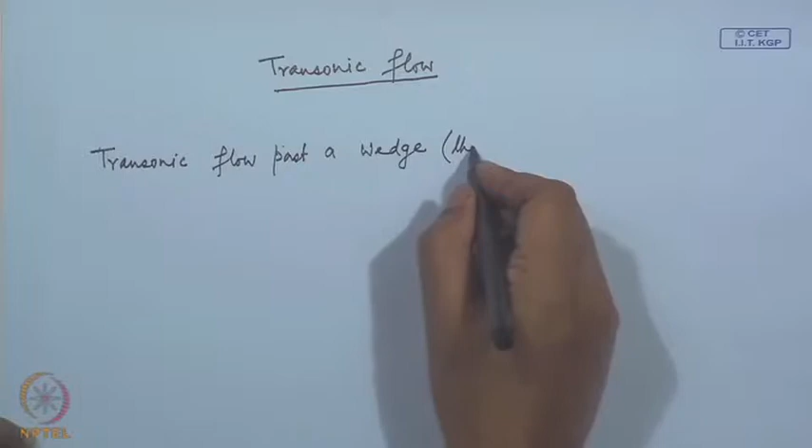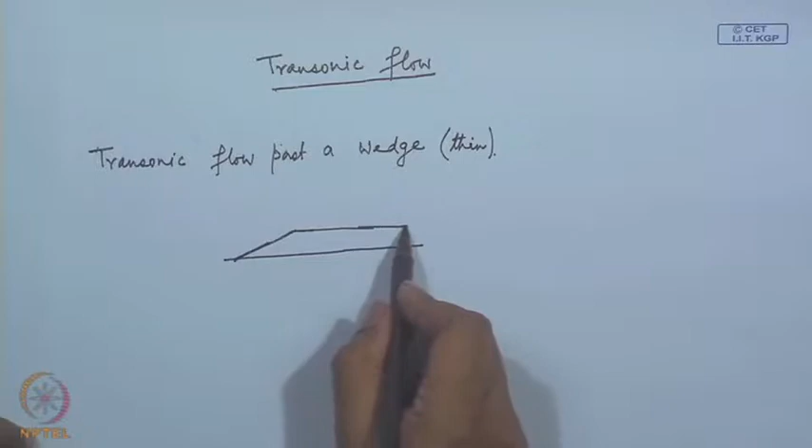Now let us first of all consider transonic flow past a wedge. Of course, we will consider a very thin wedge, and let us say that this is followed by a straight section. We will just consider half of the wedge. So thin wedge means theta is small.

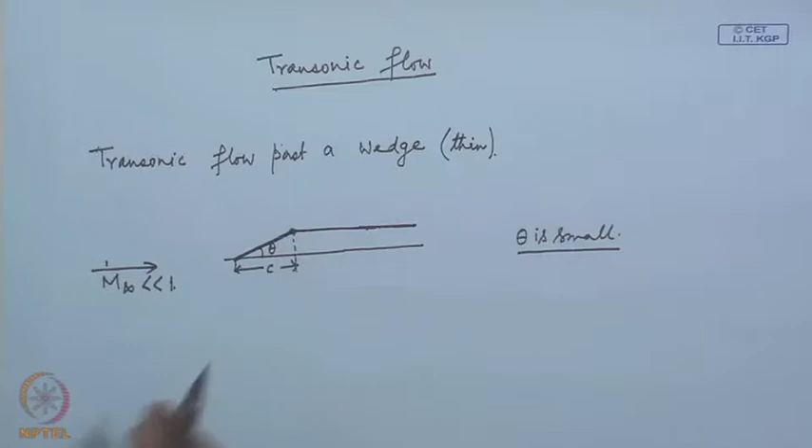Now what happens? Let us consider first a flow which is much smaller than 1. Consider a free stream m infinity which is much smaller than 1. We know the flow will accelerate over this wedge, will reach the highest velocity here. Let us see. Flow accelerates over this part.

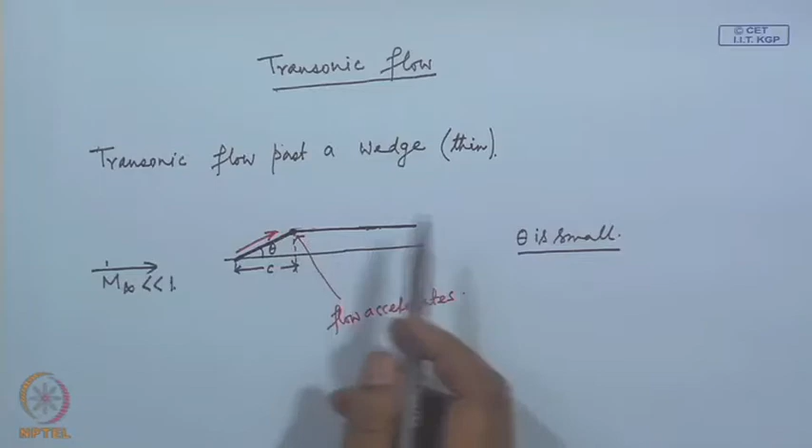Now, consequently, as we go on increasing the Mach number, a situation arises when the Mach number reaches unity here, and then there will be a supersonic region behind this shoulder, which will be terminated by a normal shock. So let us say at...

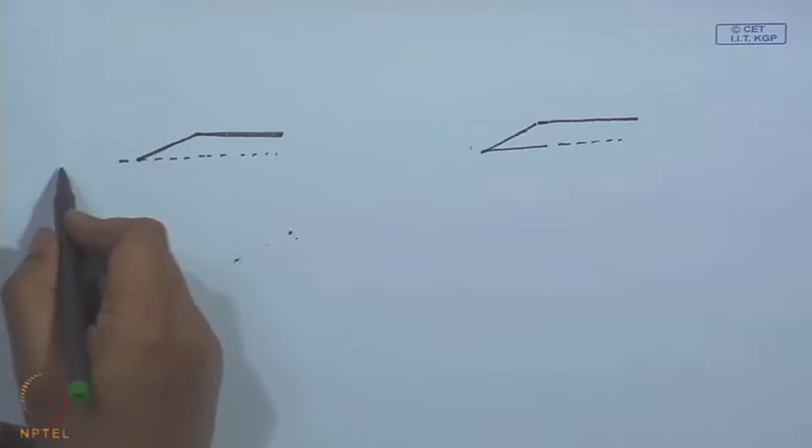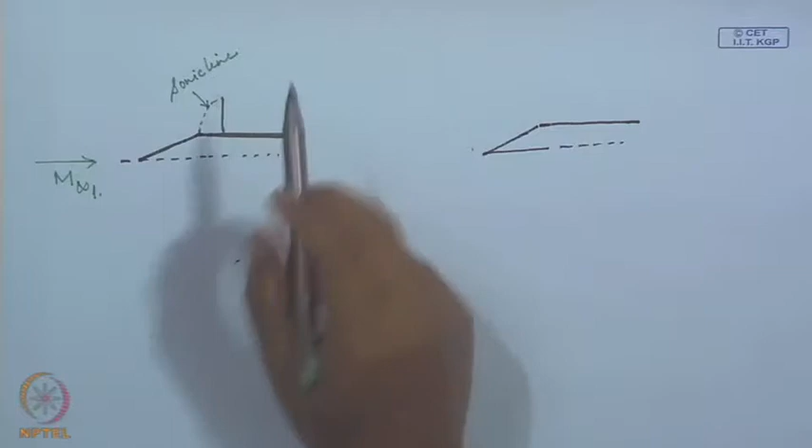Now consider these cases where here let us say we have a free stream Mach number m infinity 1, and this is the sonic line. That is, at all the points which lie on this line, the flow velocity is sonic. This is a supersonic region.

This is a supersonic region, and again here it is subsonic. This supersonic pocket is terminated by a shock, which is almost a normal shock.

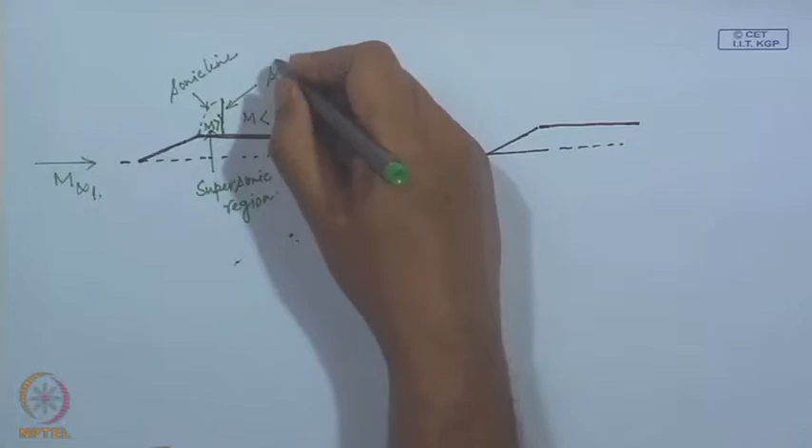Now let us consider another free stream Mach number, which is higher than this first free stream Mach number. Let us again call it m infinity 2. Again in this region the flow will become...

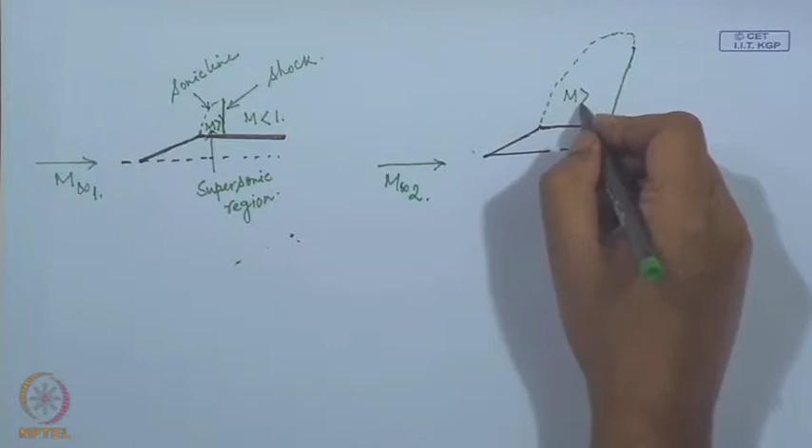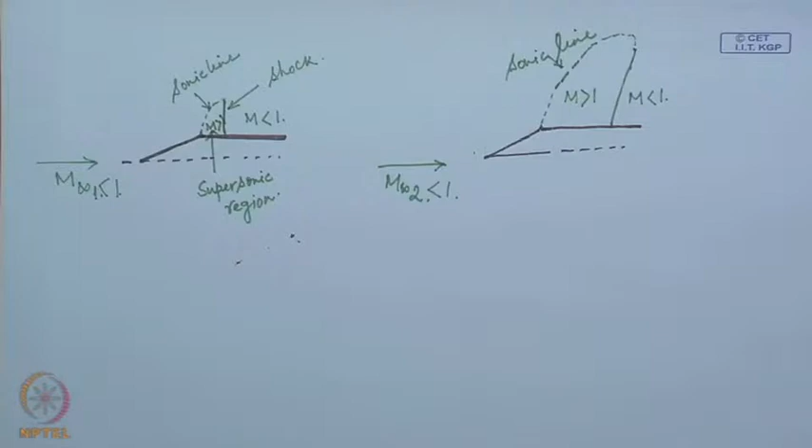In other words, as the free stream Mach number now goes on increasing, but they are still less than 1, subsonic, the free stream Mach number is still subsonic, however they are increasing, and we are seeing that as the free stream Mach number increases, the size of this supersonic region increases. Similarly, as we go on increasing this Mach number, the free stream Mach number, this shock goes downstream, the shock moves downstream, and the supersonic region increases.

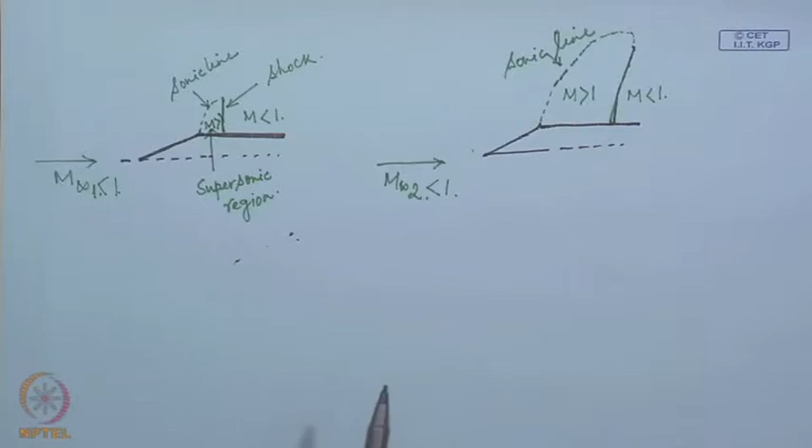So as the Mach number increases towards unity, the shock moves downstream, and the supersonic region will become larger and larger.

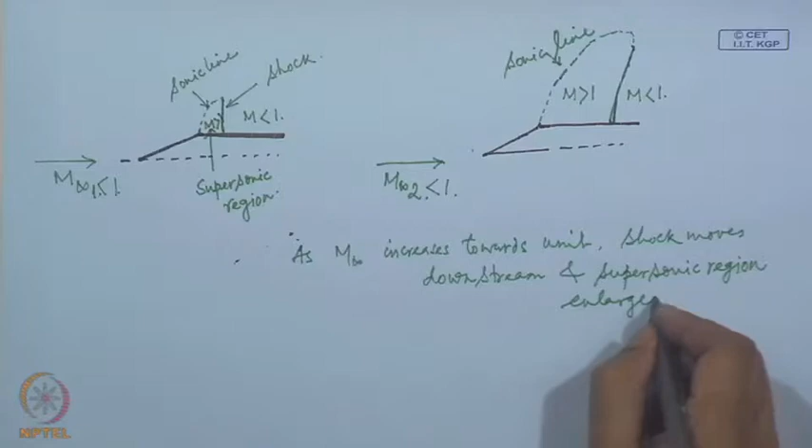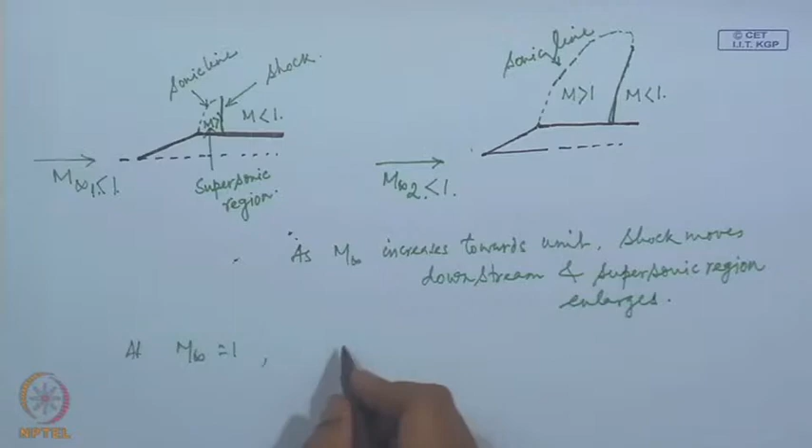Now when the free stream Mach number reaches unity, this shock moves to downstream infinity. However, simultaneously another shock appears at minus infinity. So at this point, the shock moves to downstream infinity, and another appears at minus infinity.

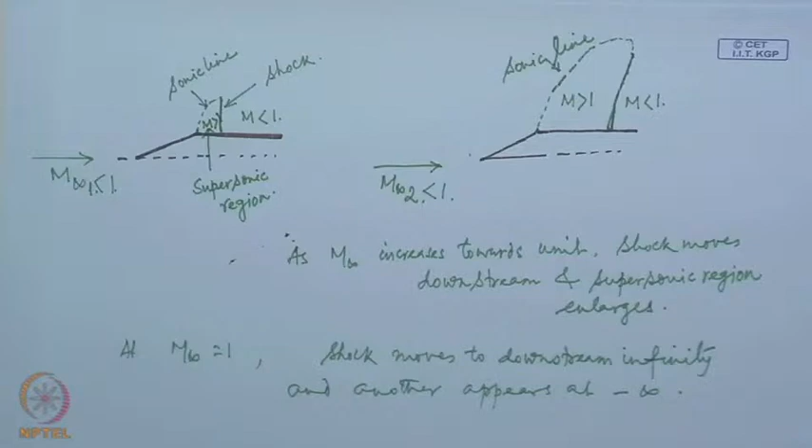Now let us say further increase of m infinity, that is the free stream is now supersonic and is going away from 1. This bow shock that first appeared at minus infinity will now move towards the body.

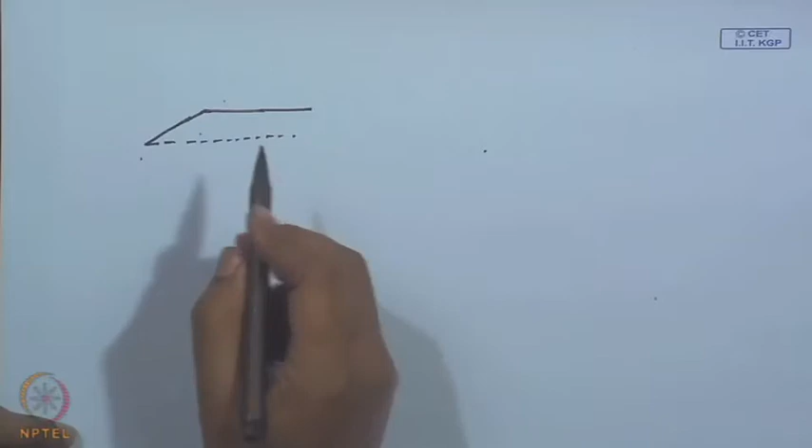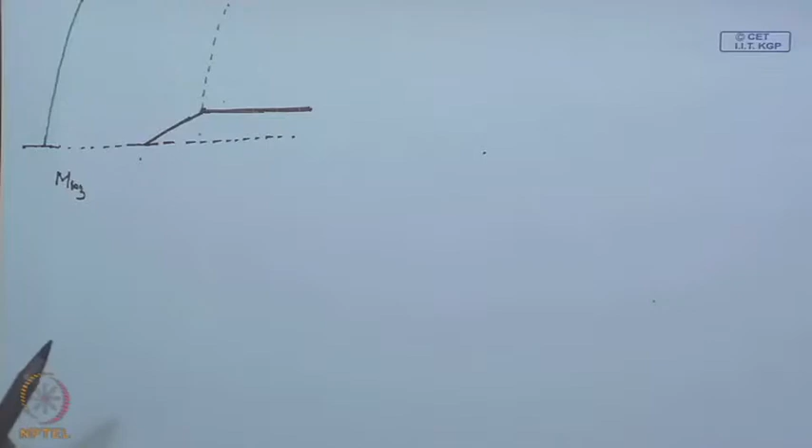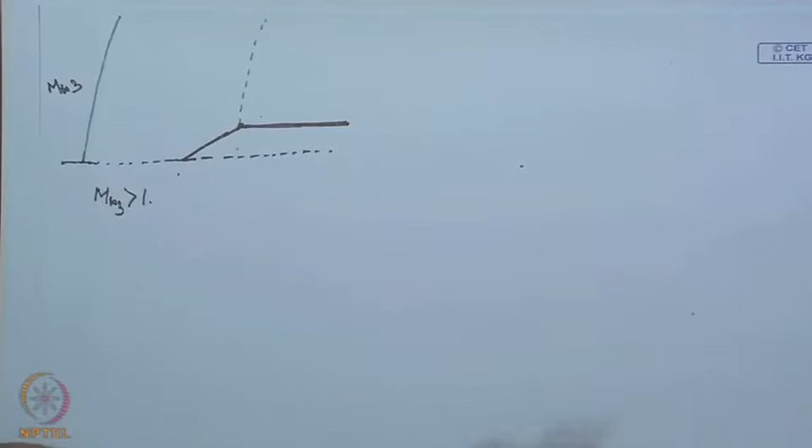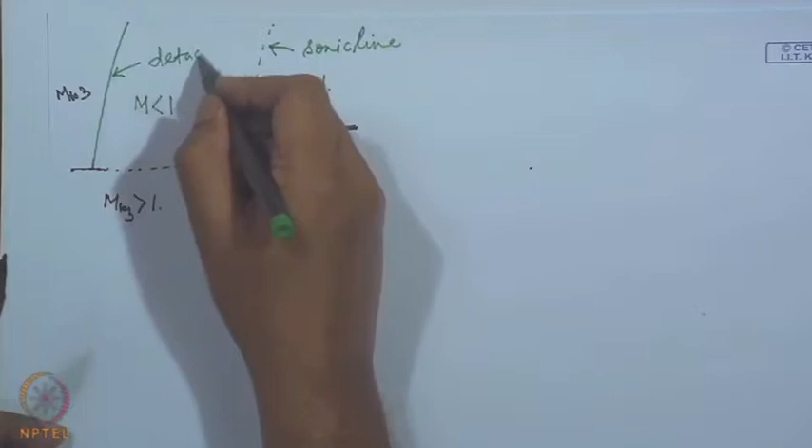So we will call it m infinity 3, the detached bow shock there, and the sonic line there. Behind the detached shock, the flow here is subsonic, and here the flow is supersonic. This is once again the sonic line. Detached bow shock.

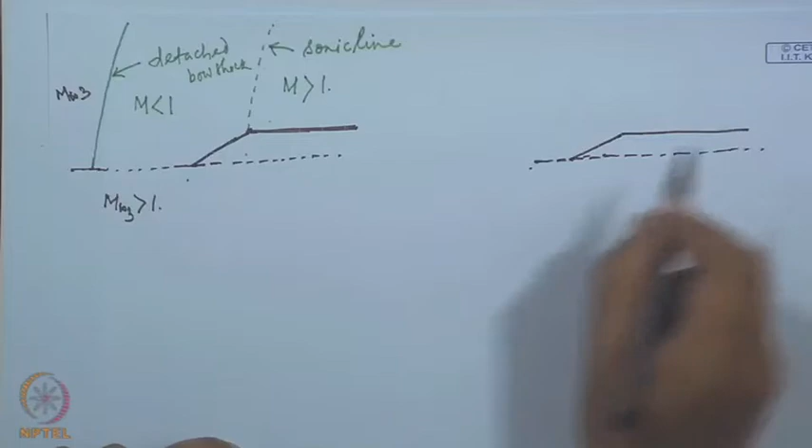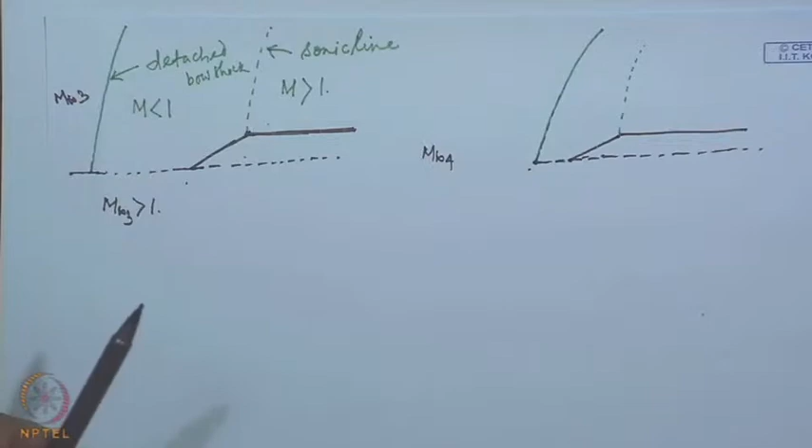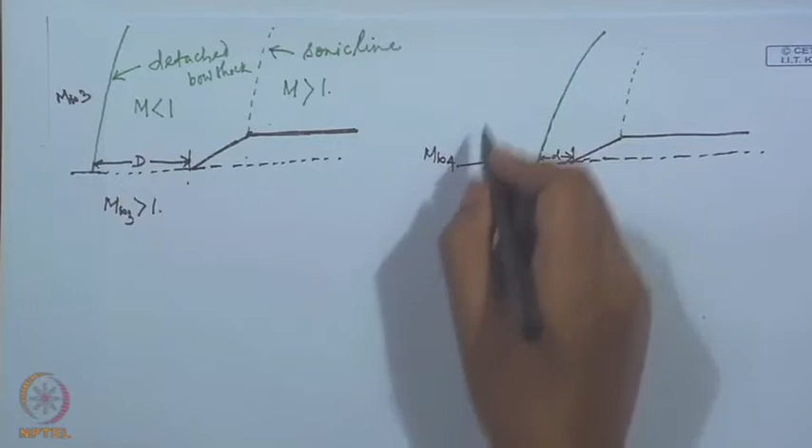If the free stream Mach number is increased further, we have here m infinity 4, greater than m infinity 3, and d is smaller than D. That is, the shock approaches the body, however still detached, and there is a subsonic region here.

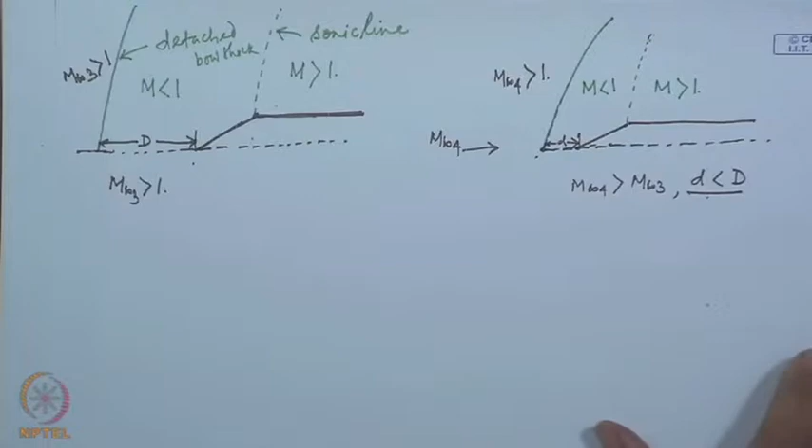If the free stream Mach number is further increased, at one stage it will come where the shock will attach to the nose of the wedge, however will still remain curved. Let us call that m infinity 5.

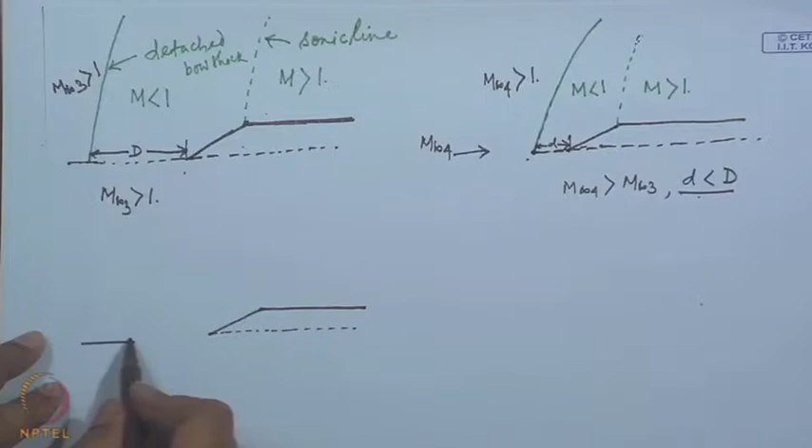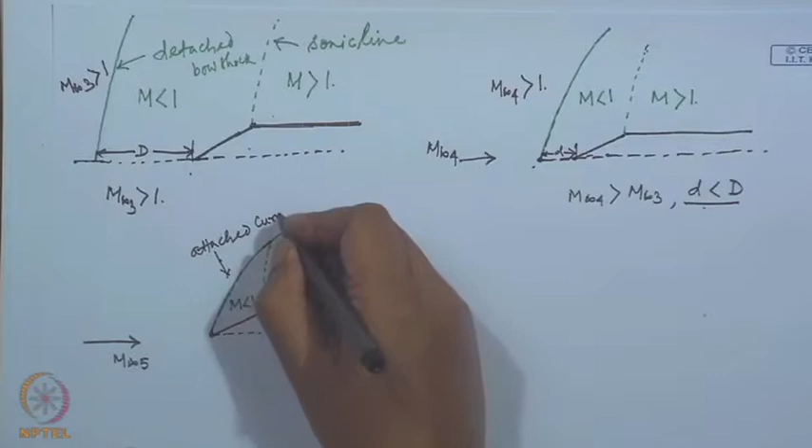The shock has now attached to the nose, that is, this detachment distance has become zero, but it is still little curved. This is the region where M is less than 1, and in this region M is greater than 1. So this is now an attached curved shock, and then if we increase it further...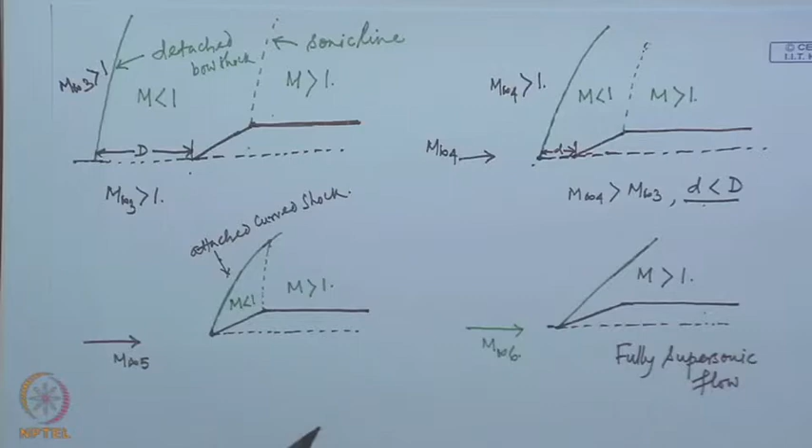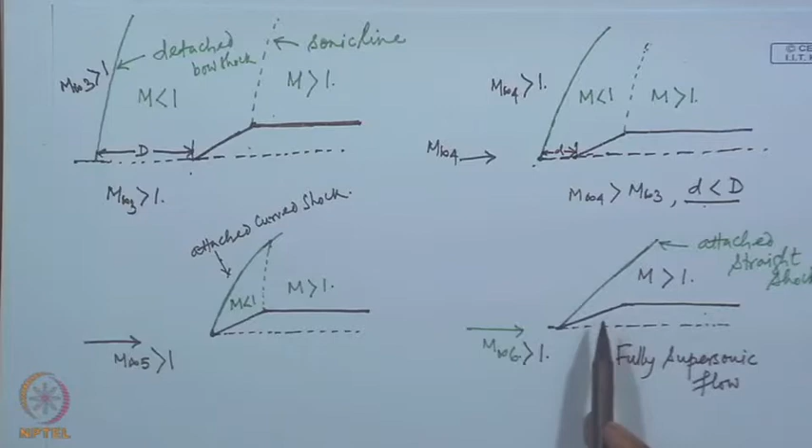So this is now fully supersonic flow, attached straight shock, okay, all these are greater than 1. So this is actually the solution that corresponds to the earlier shock wave angle that we have discussed in case of oblique shock, that corresponding to a particular theta, there is a minimum Mach number at which an attached oblique shock is possible. So this corresponds to that attached oblique shock.

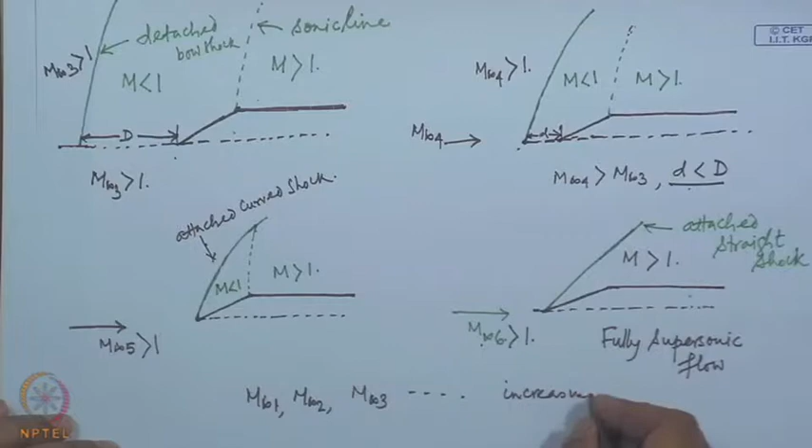So this is a fully supersonic flow, and all the other sequence, that is M infinity 1, 2, 3, M infinity 1, M infinity 2, M infinity 3, M infinity 4 and M infinity 5, they represent all transonic flow. So we will mention here that M infinity 1, M infinity 2, M infinity 3 is an increasing sequence, that is M infinity 2 is higher than M infinity 1, M infinity 3 is higher than M infinity 2, M infinity 4 is higher than M infinity 3 and so on. And this flow is transonic for all M infinity 1, M infinity 2, M infinity 3.

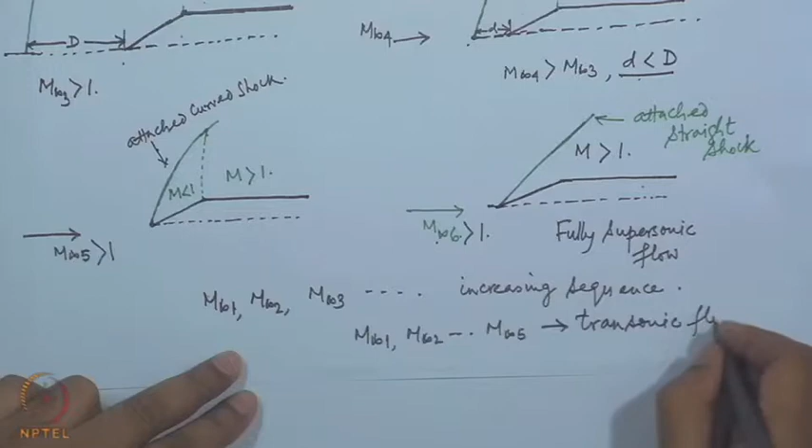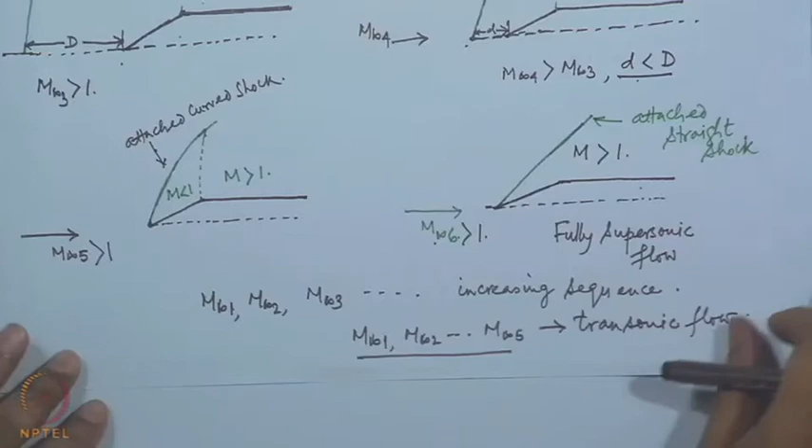The flow corresponding to these free stream Mach numbers are transonic. So the transonic flow is possible for free stream Mach number less than unity as well as free stream Mach number higher than unity. As long as we consider a very slender body, then as long as that transonic similarity parameter lies between -1 to +1, or in the general case, as we have mentioned, the transonic flow is a mixed flow containing both subsonic and supersonic flow together. And also, as we have seen in this qualitative description of flow over a wedge with a straight after body, there is a minimum subsonic Mach number at which the transonic region starts, and again a maximum supersonic Mach number at which the transonic region ends.

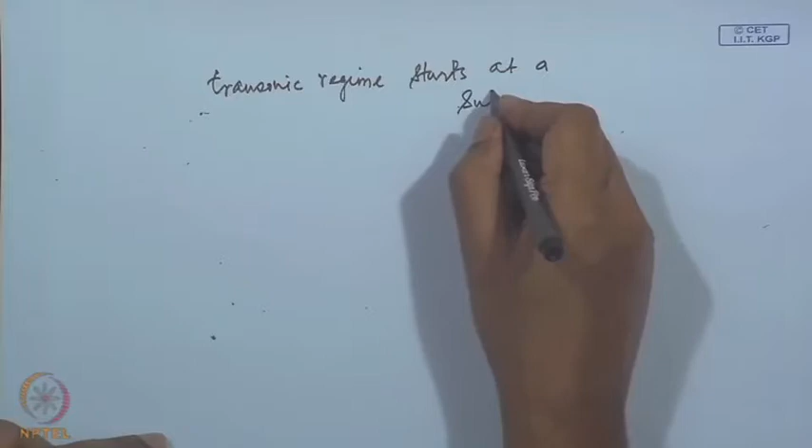So we have: the transonic regime starts at a subsonic free stream Mach number and ends at a supersonic free stream Mach number.

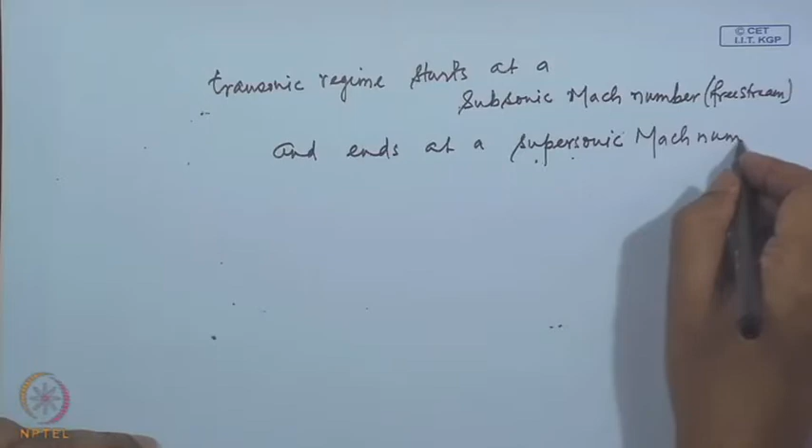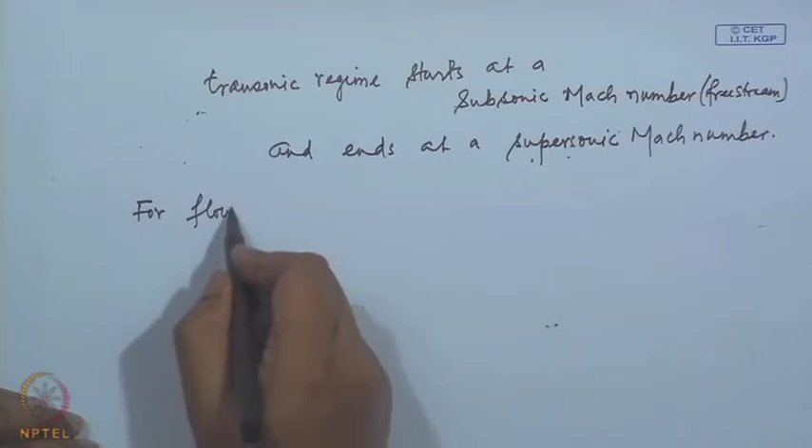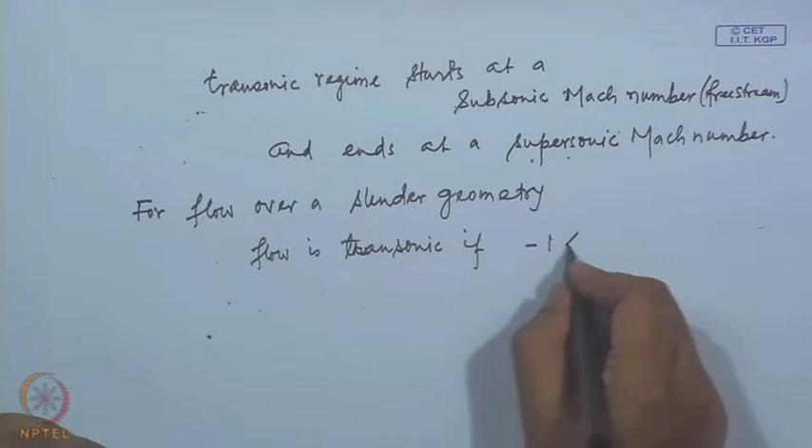For small perturbation, for flow over a slender geometry, flow is transonic if minus 1 is less than or equal to (M infinity squared minus 1) divided by (gamma plus 1 times tau times M infinity squared), raised to the power 2 by 3, less than or equal to 1. So you see the two ends of this regime are characterized by the values of minus 1 and plus 1 for this transonic parameter. And these Mach numbers are called the lower critical Mach number and the higher critical Mach number.

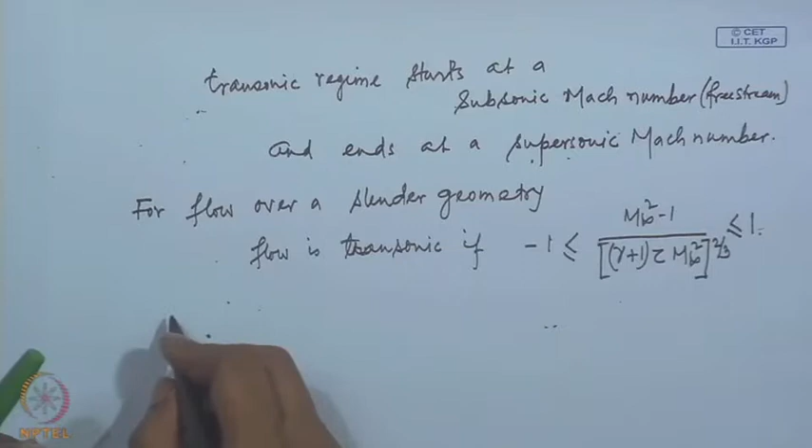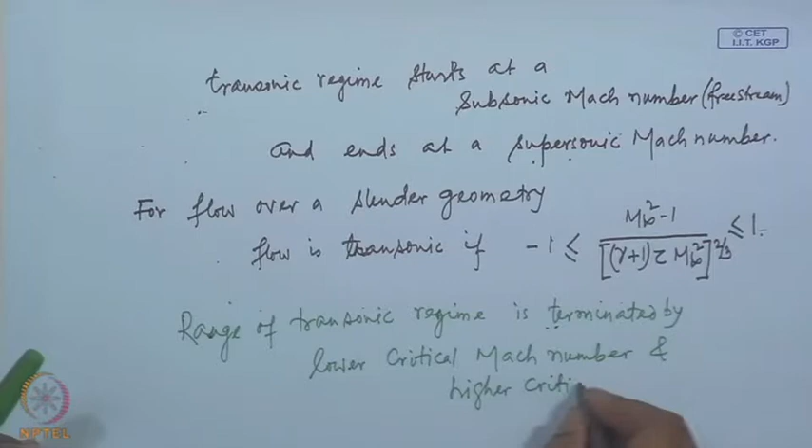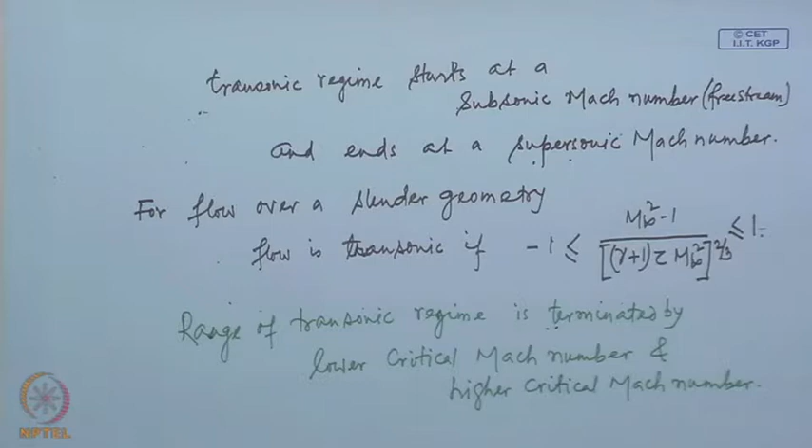Range of transonic regime is terminated by lower critical Mach number and higher critical Mach number. That is, the transonic regime starts at the lower critical Mach number and ends at the higher critical Mach number. Based on this definition, the lower critical Mach number corresponds to minus 1 and the higher critical Mach number corresponds to plus 1. And considering the general case, the lower critical Mach number is the free stream Mach number at which the highest local Mach number over the body is unity.

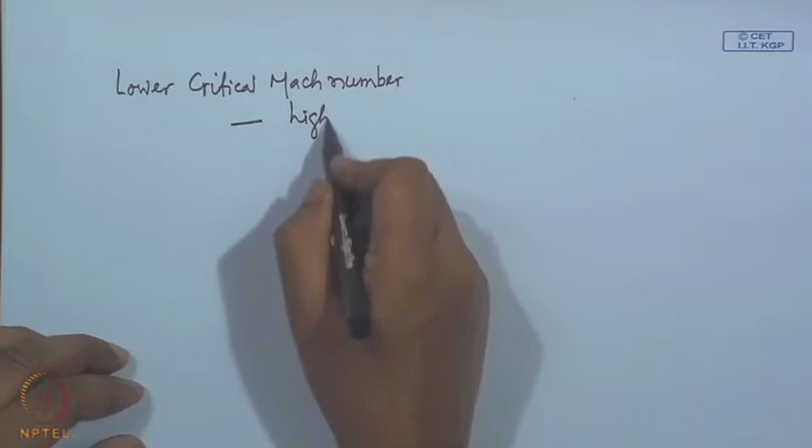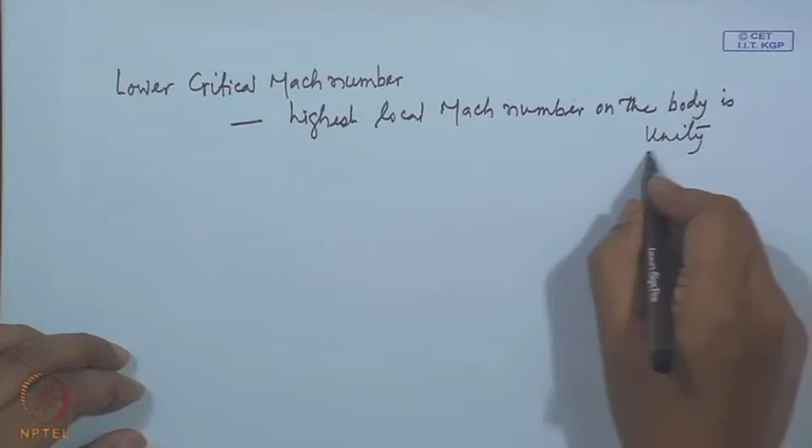So we can define the lower critical Mach number as the Mach number at which the highest local Mach number on the body is unity. Similarly, the upper critical Mach number is the Mach number at which the lowest local Mach number is unity.

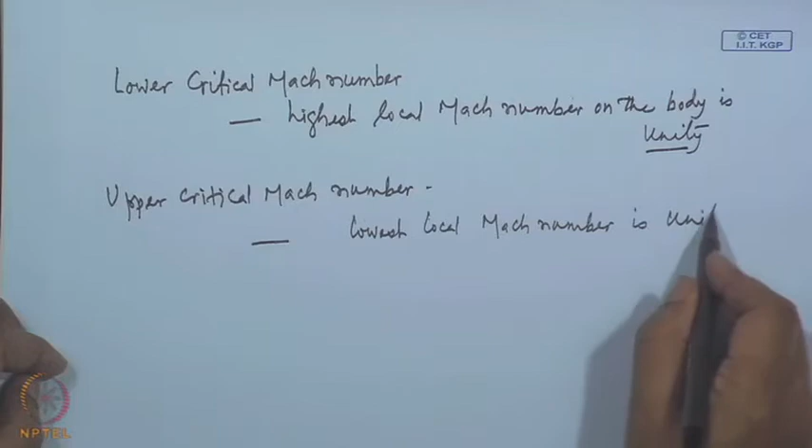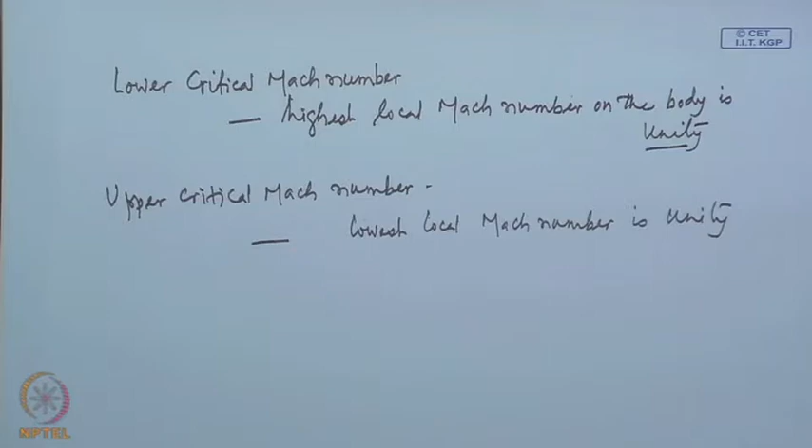That is, in case of the lower critical Mach number, there is only one point in the flow field which is sonic, and in the upper critical Mach number there is only one point again in the free stream where the lowest velocity is sonic. And since the transonic flow regime is very important, particularly in case of aviation industry, where most or all commercial airliners fly in the transonic range, estimation of lower critical Mach number is very important for design of airfoils and wings.

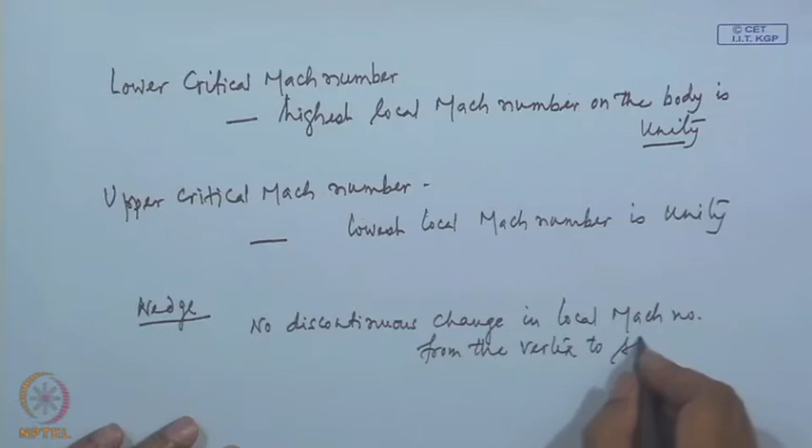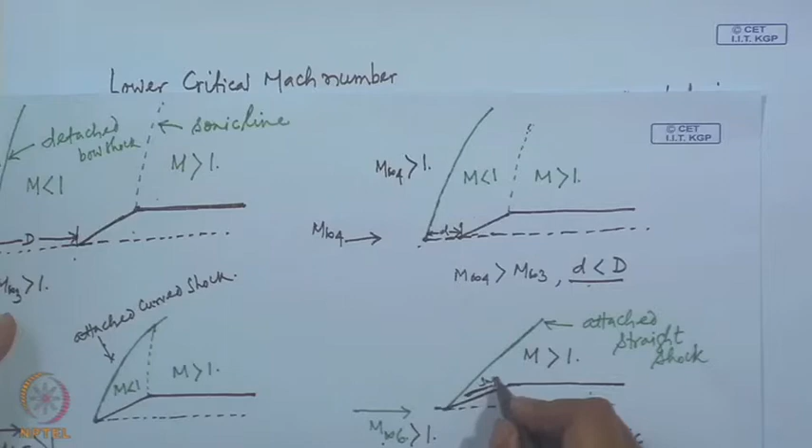Over the entire transonic range, the change from subsonic to supersonic flow is smooth and continuous. We have seen that up to M infinity 5 the flow over this wedge remains subsonic, and at higher Mach number, for M infinity 6, the flow over this wedge has become supersonic in this part. So this change from subsonic to supersonic over this wedge surface is smooth and continuous. There is no discontinuity over this entire Mach number range, say from M infinity 1 to M infinity 5.

Now, if the drag is plotted against Mach number, this of course shows a very rapid increase towards infinity. Now, from the basic nature of the flow, since this changeover from subsonic to supersonic is smooth, so the variation in the drag should also be smooth. This implies variation in forces or force coefficients should be smooth and continuous.

However, if either C D or C L is plotted against Mach number, then we find a discontinuous change, that is, let us say consider C D.

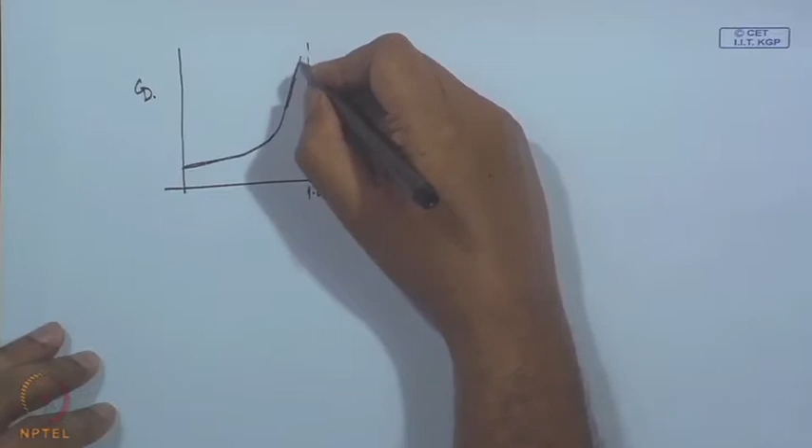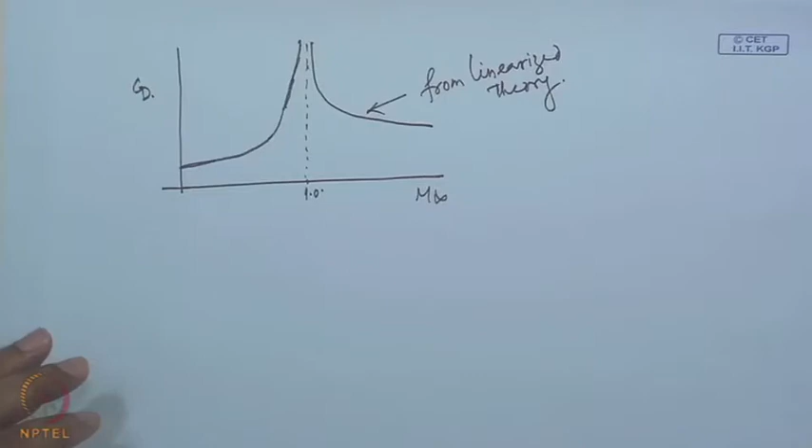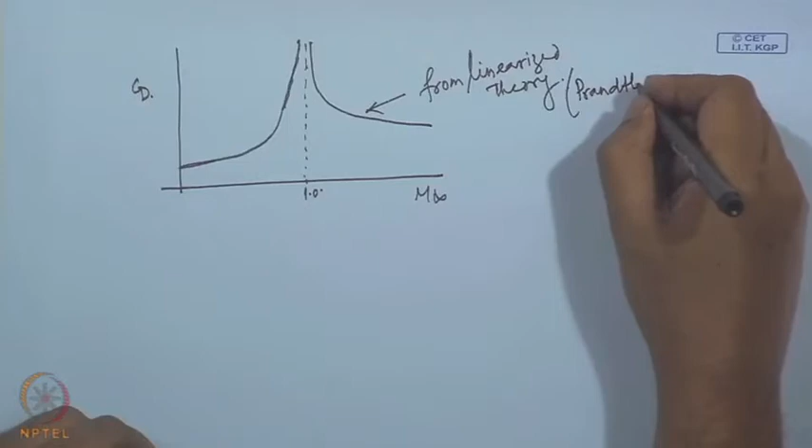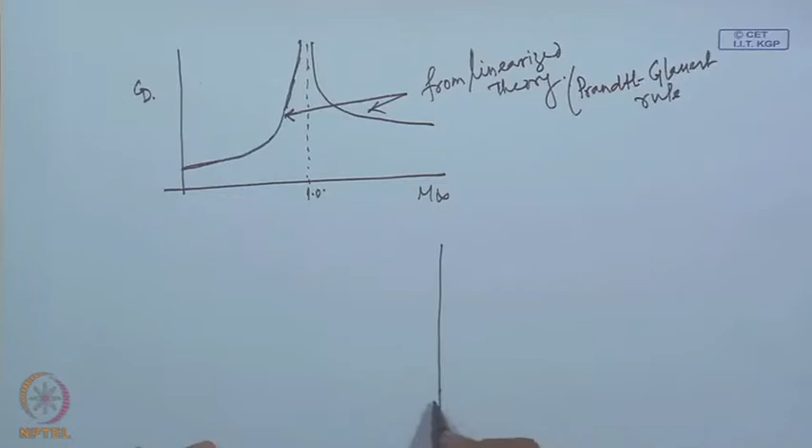This is according to the linearized theory, that is, say as an example, the Prandtl-Glauert rule. However, if the transonic similarity rule is used, then if we remember that this is what we defined as C d into gamma plus 1 M infinity squared to the power 1 by 3, by tau to the power 5 by 3, and the parameter chi is 1 minus M infinity squared by...

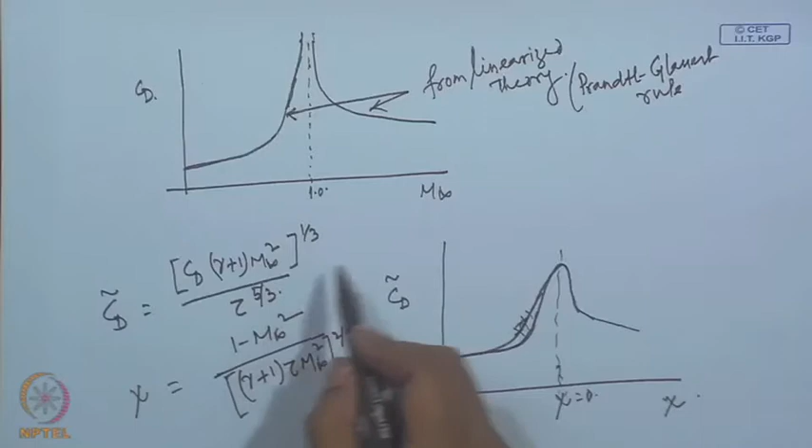There is no such discontinuity or anything when it is plotted. So these are basically the appropriate variables that are to be used for the transonic range.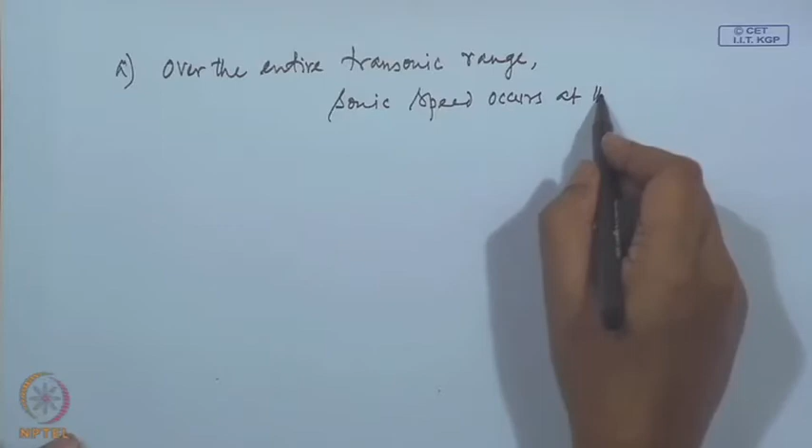Now let us talk about certain features of transonic flow. What we have seen is that over the entire transonic range, the sonic velocity occurs at the shoulder. So over the entire transonic range, sonic speed occurs at the shoulder. That is, sonic speed is not reached on any flat part of the body, and...

In case of a subsonic free stream, the sonic line is attached to the nearly normal shock downstream, and in case of a supersonic free stream, this sonic line is attached to the bow shock in front, or even in the end of the super transonic range, it is attached to the curved leading edge shock.

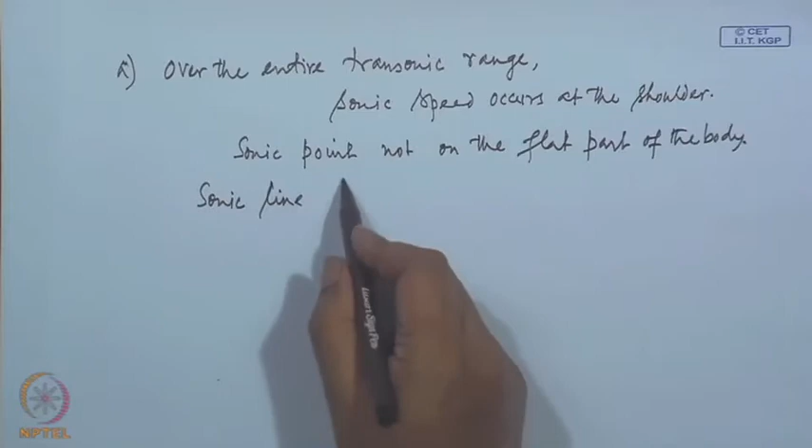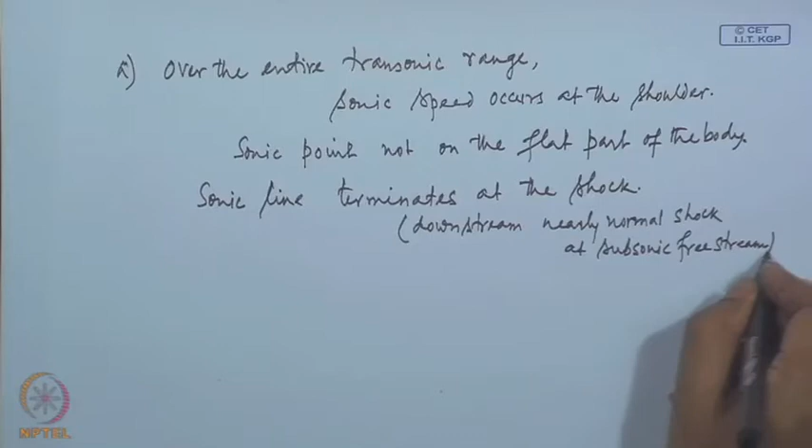So, sonic line, sonic point, not on the flat part of the body. The sonic line terminates at the shock which is downstream, a nearly normal shock, at subsonic free stream, and with the detached bow shock for supersonic free stream.

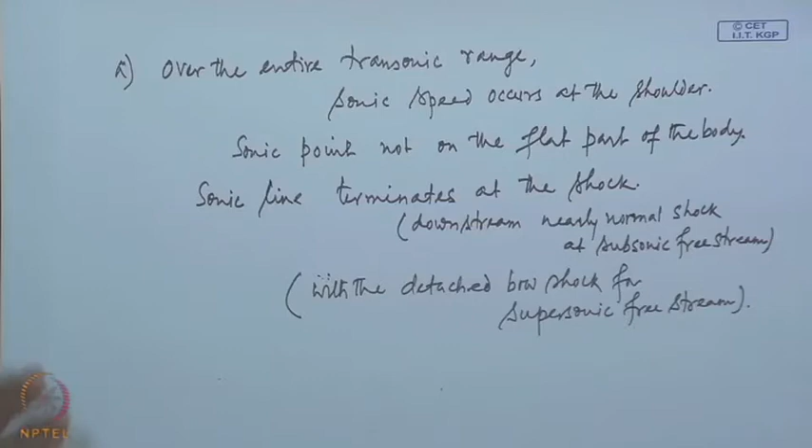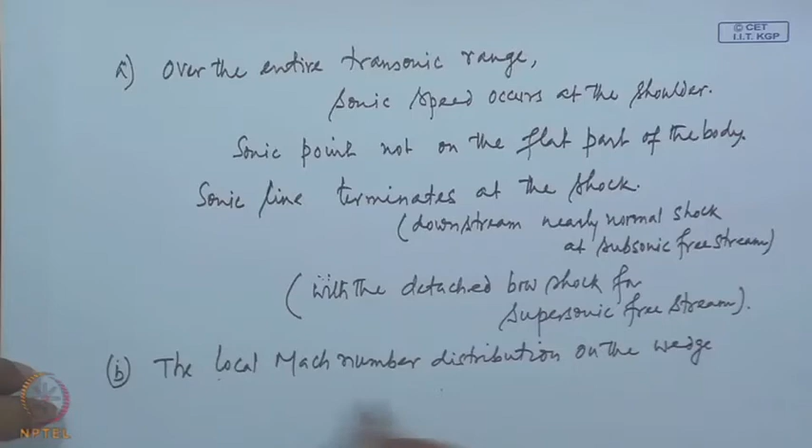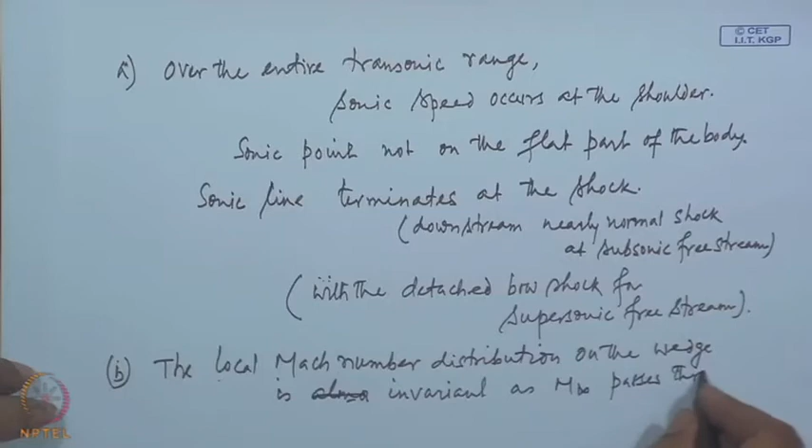Another very important observation is that the local Mach number distribution is almost invariant as the flow passes through unity. That is, the local Mach number distribution on the wedge is almost invariant as M infinity passes through 1. That is, when M infinity is very close to 1, either subsonic or supersonic, the Mach number distribution on the wedge part will remain the same, or the flow velocity is almost constant when the Mach number is very close to unity.

So this can of course be shown very easily using a little bit of mathematics. Say, first of all, let us take M infinity a little larger than 1.

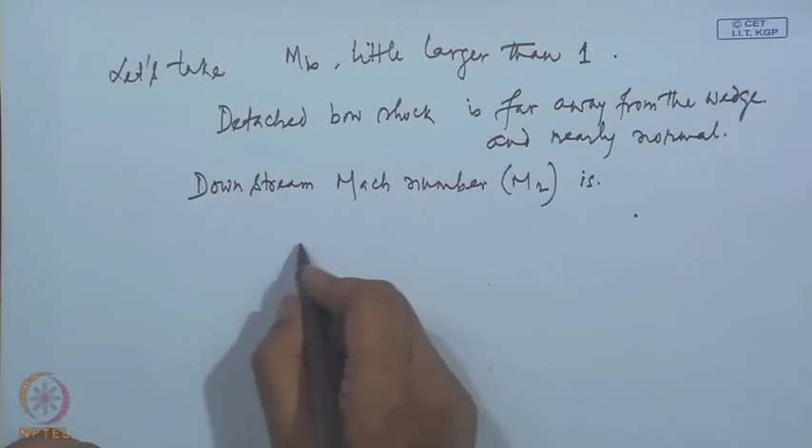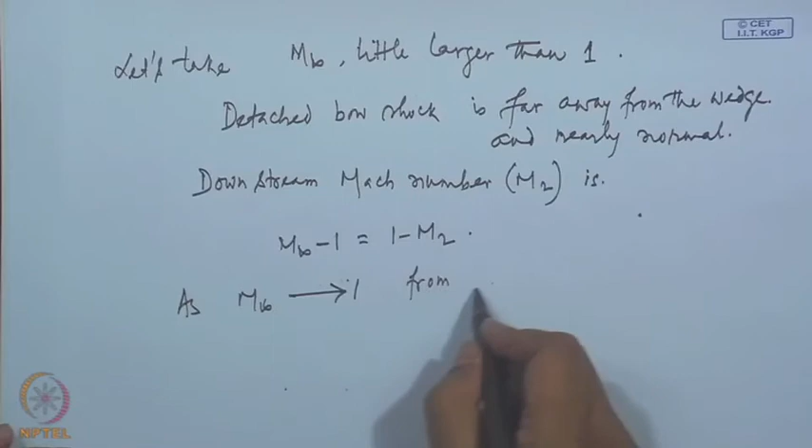So what we see here is that as M infinity approaches 1 from supersonic values, M2 approaches 1 from subsonic values. That is, say as an example, if M infinity is 1.02, then M2 becomes 0.98. So as you see, the wedge is facing a free stream at Mach 0.98. So whether the free stream is at 1.02 or 0.98, the wedge is actually experiencing the same flow.

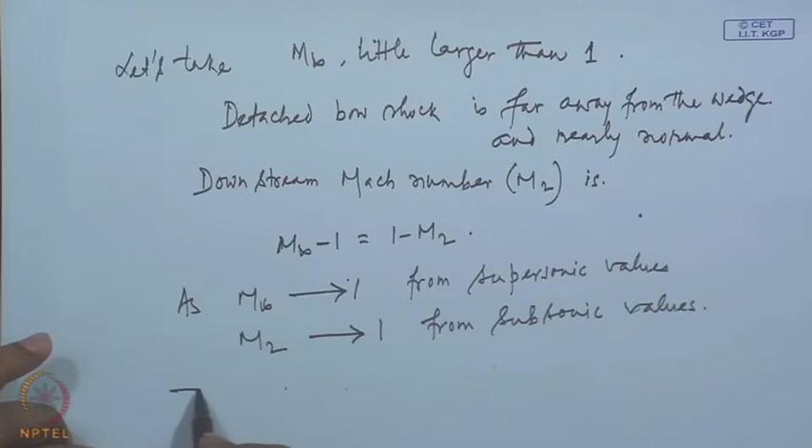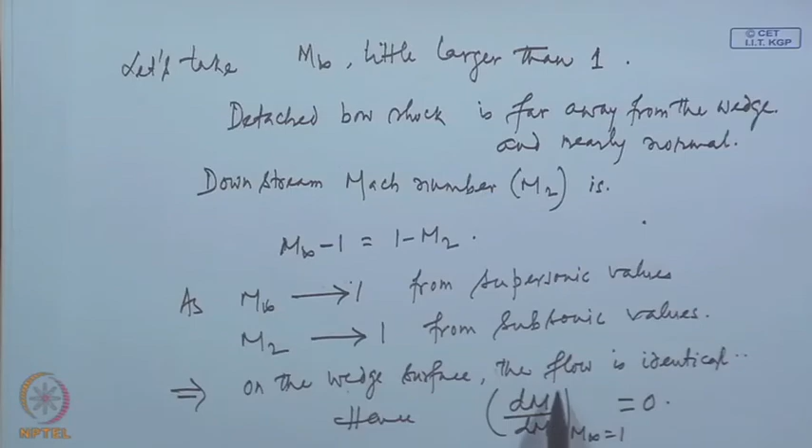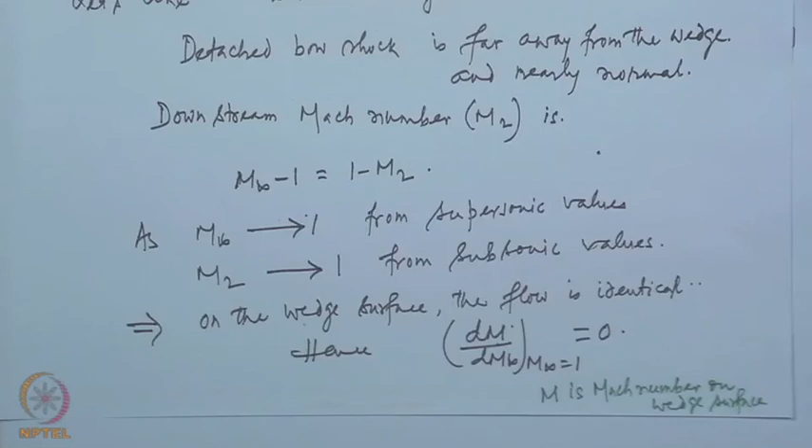This is of course based on the qualitative description, and also supported by physical observation in different experiments, that this is true: when free stream Mach number is very close to 1, whether subsonic or supersonic, the flow on the wedge surface is identical.

This simple result can of course be used to obtain some other important relations regarding flow over a wedge. Particularly, we can even show that the pressure coefficient or force coefficient are also almost invariant very close to M infinity equal to 1.

And this we will continue in the next class, and we will conclude this discussion by noting that we have qualitatively analyzed the flow over a thin wedge in the transonic range. We have clearly defined the lower critical and upper critical Mach number, and we have also discussed briefly some of the very basic physical nature of transonic flow.